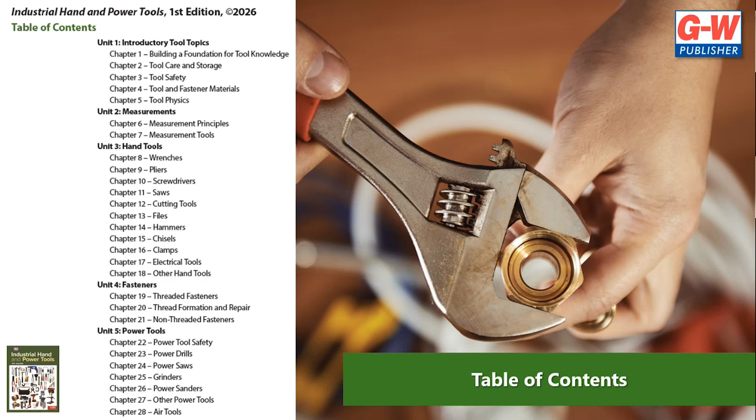Speaking of flexibility and also consistency, there's a deliberate consistency among the tools chapters that was developed by Jim and his editors. Jim, do you want to share the importance of making sure that these topics were included in each of these tools chapters?

Yeah, I think I just wanted to make sure that it was comprehensive. I didn't want to leave anything out. It was helpful to have a standard format to begin each chapter with an overview of what the tools do, and then to have sections on very specific types of those tools.

To have a dedicated section on safety, a dedicated section on care and storage. And then every chapter also has a very short paragraph at the end that says, of these 17 different types of pliers that we talked about, obviously you can't carry around a toolbox with every tool in that book, but if you're going to be selective, here's the 3 that we recommend. And that's tied together in an appendix at the end of the book. In Appendix A, I have a couple different versions of recommended tool sets.

Excellent. As I mentioned, we're going to sprinkle some student feedback throughout the session today. One of Jim's students said, I appreciated how consistent the chapter organization was, and the content was thorough without getting too into the weeds of specific use cases. So nice to hear directly from your students on this.

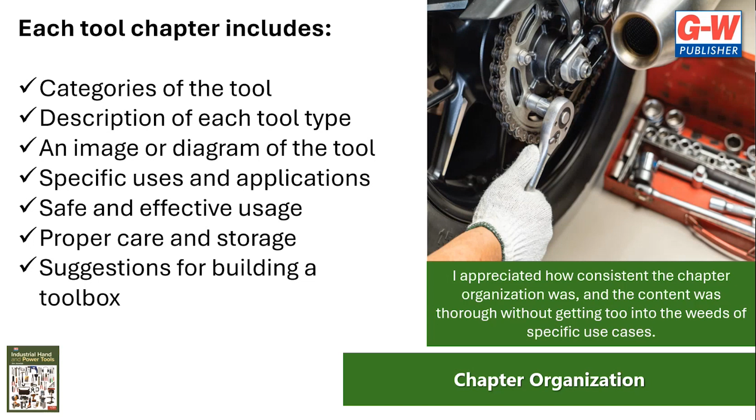So we're going to walk through a complete chapter to give you a sneak peek of what these chapters look like, as we wait for the sample to be available for all of you. We're starting with the Unit 3 opener. It's a unit opener that contains a number of chapters. You'll see the list of chapters is included in the unit opener, as well as a nice introduction to the complete unit that sets the stage.

At this point, I wanted to mention another comment from one of Jim's students. He said, I've used hand and power tools for most of my life, but I feel like I have a much better understanding of the tools and processes far beyond basic use and function. That might even speak to the physics chapter, Jim, or some of the other information you've included in the chapter. I thought that was a really nice comment from one of your students.

Yeah, it was nice. As I said, I wrote this with the novice in mind, but I've had a number of students who really do have a good background and understanding of tools, and most of them have told me that they did learn something. I read that too in the student feedback. I thought that was a perfect balance.

So here's chapter 8, and the chapter openers are designed with the learning outcomes, the technical terms, and an overview of the chapter content. Some key notes: the learning outcomes are tied to the specific sections of the chapter and also to the end of chapter content. You'll see 8.1 through 8.12, which show you the learning outcomes and which sections those learning outcomes are going to be covered.

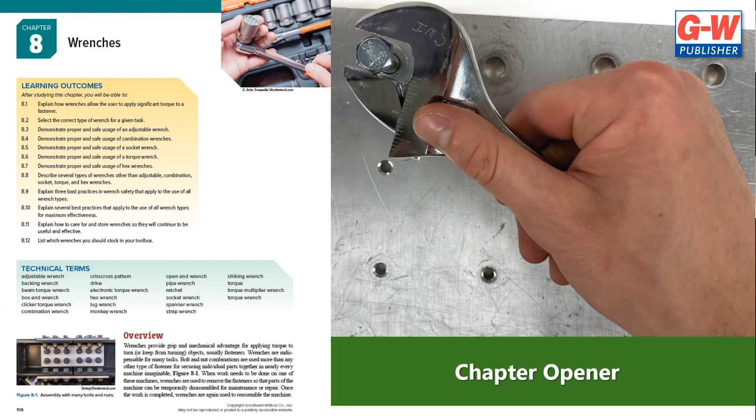So absolutely. As we flip through the sample chapter, you'll see those section numbers that align with the learning outcomes I just mentioned in the chapter opener. And as Jim mentioned, you'll find many charts, figures, and images. You'll also see that the content is broken up in chunks to make it more student friendly.

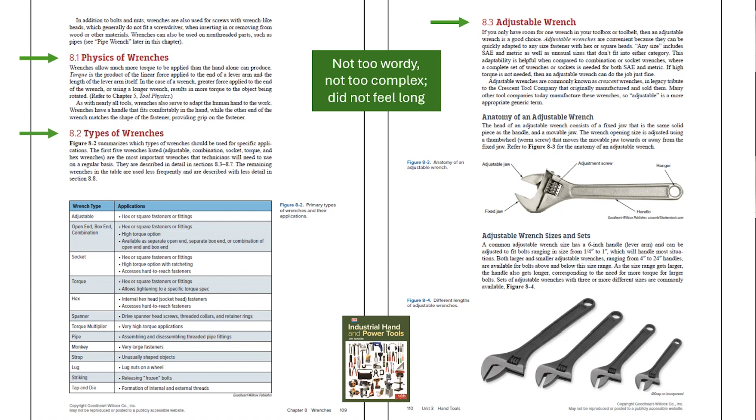The green box up at the top: not too wordy, not too complex, did not feel long. I think that's a wonderful student testimonial for the content, that they really liked the amount of content and the way it was organized, so it never felt too wordy to them. It's a tough line to walk, to include enough content to be comprehensive, but not to get long and boring. Exactly. Well, I think you achieved it.

It does. Super visual, image-rich text makes it easy for students to clearly identify the right tool for the job. And as Jim mentioned earlier, a lot of students are new to this. They don't come to class with a lot of tool identification skills in place, so these images are super helpful, especially for those beginning students. And then there are step-by-step instructions, which you'll see at the top there, that describe the proper use of many tools. Do you want to talk at all about some of those step-by-step procedures, Jim, and how they're woven into the chapters?

I think it kind of speaks for itself. It is included along with pretty much every tool, how it should be properly used. In many cases, I would group tools together and speak in a little bit more general terms, not necessarily a procedure for every individual tool.

Awesome. And I know that there was a big emphasis on safety, and you'll see these caution boxes throughout the text and safety tips that provide that strong emphasis on safety to protect the workers and the equipment. And then there are pro tips that offer advice and guidance, especially applicable for on-the-job situations.

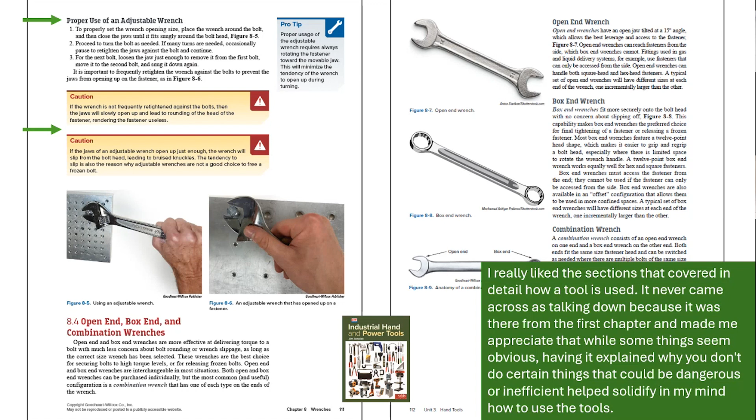Kathy, you mentioned about the cautions and the pro tips and the safety tips, and I just want to say that I'm pretty sure that's a standard GW textbook thing, and I love it because there are these little nuggets of information that these tips provide a means to get highlighted that otherwise would, I think, just get lost in the text.

I think you're right, absolutely, and you're right. Safety is always important with any of these disciplines. And the pro tips, what I like about those too is these students are all preparing for careers, and they really provide some relevant advice to them that they'll use in your classes and also as they start their careers. So I'm glad you like those as well.

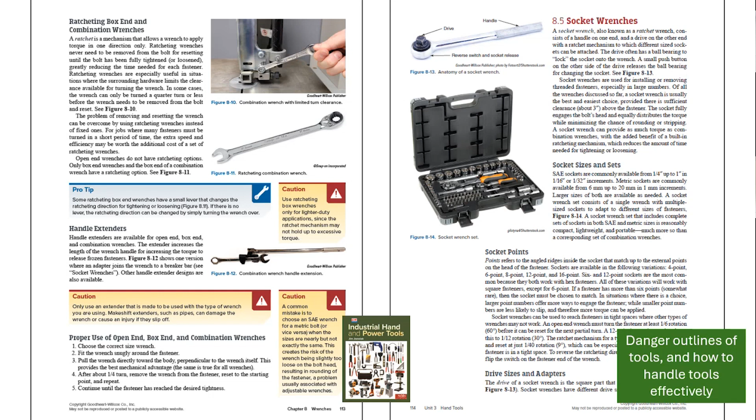Again, so many images. So this just, as we lay out this chapter, every time I flip through the pages, I'm just amazed in how student-friendly the book is laid out.

Again, here's some more caution statements, another step-by-step procedure, this one on the proper use of open end, box end, and combination wrenches. And students with little or no experience with regards to tools need to see these tools, as we mentioned, was why it was so important to make this text so visual.

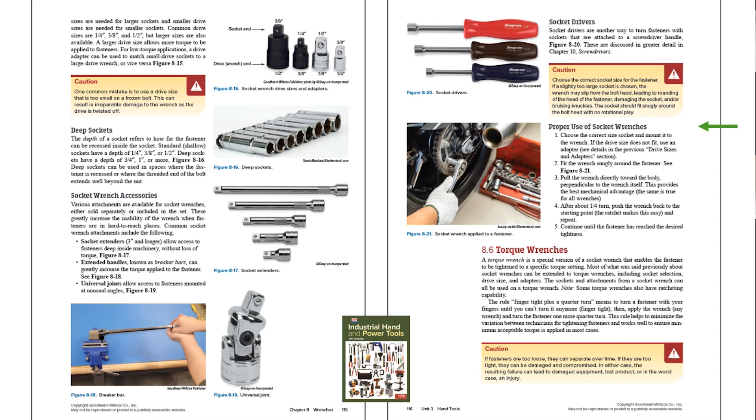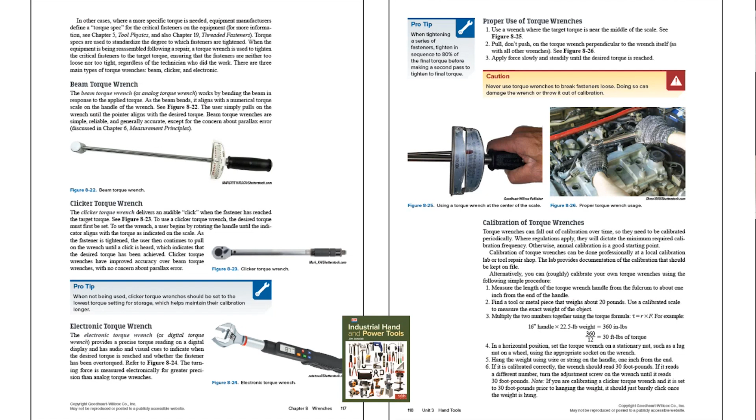And then I wanted to make a note too that the figures and procedures are all located at the point it is covered in the reading. I always love to share that GW is fairly unique in that we have an in-house editorial team and an in-house creative team. We don't ship it out to other countries to create the books.

They're really done together with Jim and with his own editorial and production team. And we're very diligent about making sure that the content flows well with the images, and students aren't required to flip through pages to find the correct figure, on a different page than where that content is being covered. So that's really a nice attribute of all of the books, and it's certainly true here with Jim's with all of these images that are included.

Again, his student mentioned the images were a great support. It was a good mix of text and images. So I couldn't write these any better myself. Your students had some great insight.

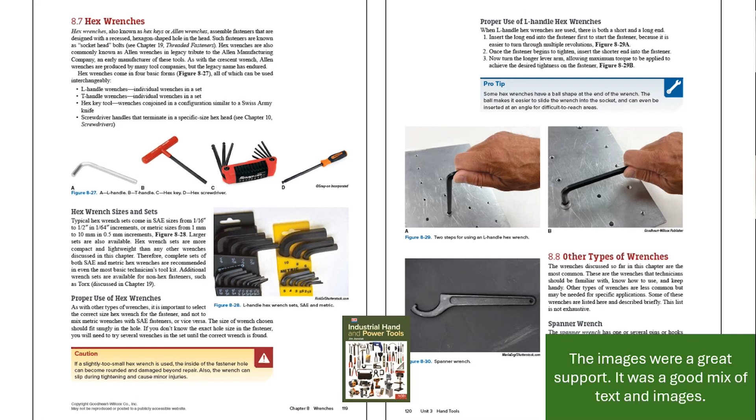As we go through this page, I'll just do another student note. It said, I think for a novice with no experience, it's not intimidating, and it doesn't speak down to inexperience, while at the same time it's technical enough and has a large enough variety to capture the attention of students with experience. So again, they're reinforcing how you laid out the book, and neat that it's being recognized that way.

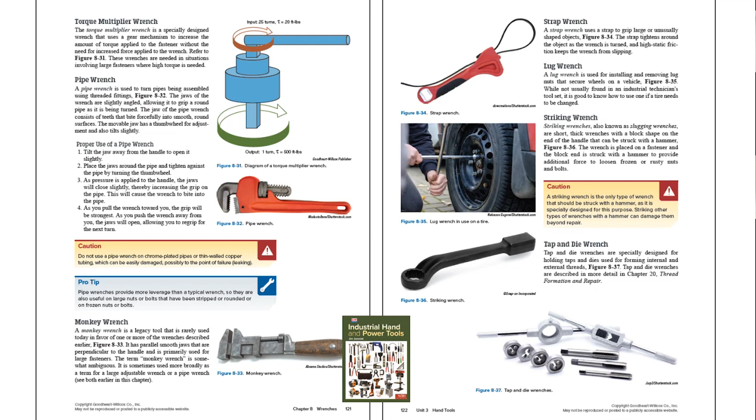And here again, we all know students love visuals, and this student mentioned visuals help me learn, and there were a good number of them. I like each tool having at least one visual and a subsequent image showing any additions or uses of the tool.

And then Jim, I think you mentioned it earlier, but that last section about which wrenches should you have in your toolbox, in this section on wrenches, I think that's what you were referring to, right? When you talked about them being able to build their own toolbox with recommended tools. Yep, I think every technician should build their own personal toolbox. Absolutely.

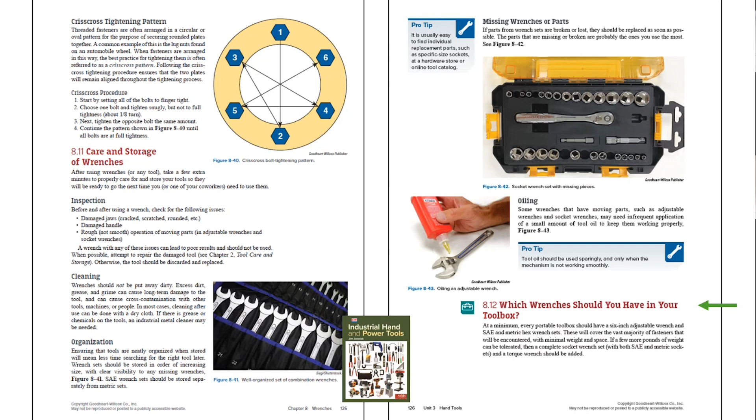And then at the end of every chapter, you'll find a summary, know and understand questions, apply and analyze questions, and critical thinking questions. You'll see parentheses with 8.1, 8.3, and those tie to the learning outcomes that tie to the sections and then tie to the end of chapter. So it really provides a nice reference point for students and instructors as they're looking at questions and need to reread something. It's easy to go back and find the section where that information was covered.

Jim, is there anything you want to share about the end of chapter content or how you might have used it with your students? Maybe a little.

So each week in my class, I assign generally 2 chapters. There's 28 chapters in the book, and in a 15-week semester, that actually works out pretty good. That's just by accident, I didn't plan that. But each week there are 2 new chapters that introduce 2 new categories of tools, and I assign those as a reading assignment to be done before they walk into class on Monday. Then on Monday, I deliver a short lecture. We then go into the lab, and I have something of a show and tell where I have the tools all laid out, and I essentially just introduce them to all the different types of wrenches, etc. I will say that I built up a pretty comprehensive tool set in my lab over the last few years, so I have samples of almost everything that is in this book. And then the rest of the week, we do hands-on activities on those tools.

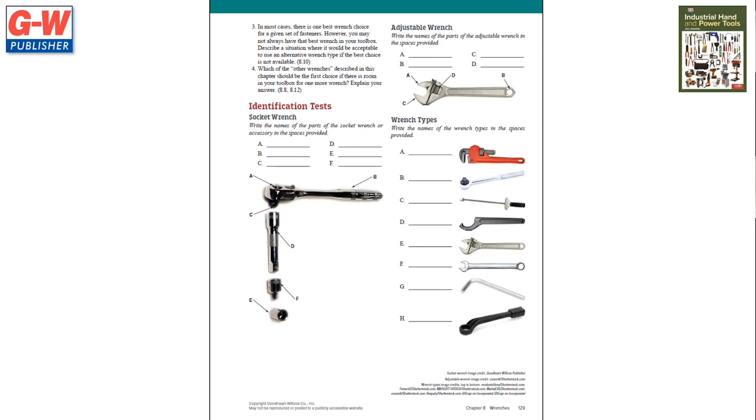Right, that's excellent. And then you mentioned the hands-on activities, and these are included also at the end of the chapters that actively engage students as they put tools into practice in the workshop and answer questions to reflect on their results. Competency test tables are provided so that students have a clear understanding of expectations and instructors have ready-made grading criteria. I know you just talked about some of the hands-on activities with your students. Now that we have it shown here for our audience, is there anything else you'd like to talk about as far as these hands-on activities?

The only thing I want to say is that most of these have been road tested. Long before I started on this book, I was already doing these in my lab and tweaking them and making them better from semester to semester. So what's written in here is what I use, and it's already proven to work pretty well.

That's wonderful, that's fantastic. And I saw that at the end of the activity, there's the reflection and questions. I think that's wonderful for students to be able to go back and provide that reflection and answer questions based on it.

And then finally, that instructor evaluation criteria. Anything you'd like to share from an instructor point of view for the criteria and rubrics that are available for instructors? I think it's just good to be consistent about what we're looking for, and to be sure that all the bases are covered, that all the safety procedures are being followed and personal protective equipment is being used, and best practices, etc. I think it just makes sure that all the boxes are checked.

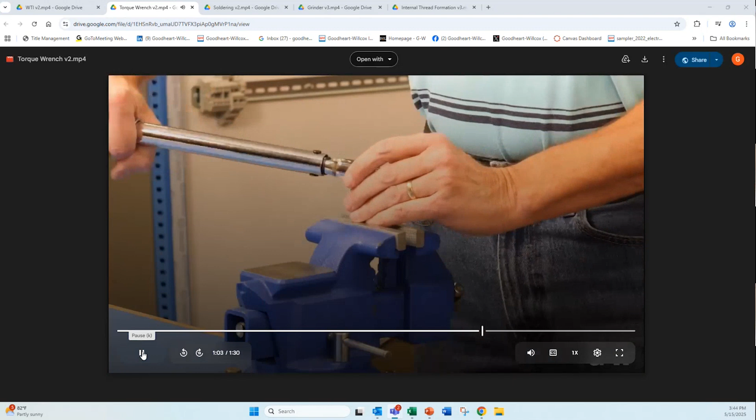Here I have the nut bolt assembly secured in a vise, so a backing wrench is not needed. However, use a backing wrench if necessary. Mount the socket securely onto the head of the bolt and pull the torque wrench toward you just as you would a socket wrench, and continue to tighten using the ratchet mechanism. Then, when the assembly becomes tight, your torque wrench will make an audible click. This is an indication that you have reached the target torque that you have set on the wrench.

The tools for this job are a tap and tap wrench, which can be found in a tap and die set. Today, for our demonstration, we'll be creating internal threading for the placement of a bolt that has a 1/4 inch diameter and 20 threads per inch.

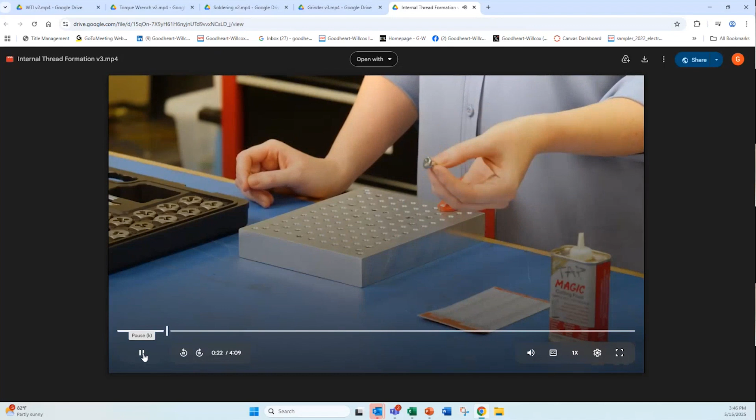What's the difference between a power drill and an impact driver? They both seem to look pretty much the same to me, says our friend in Canada, Jim. A power drill just uses an electric motor to turn the spindle that has the chuck that the drill is attached to, and is limited to the amount of power that the motor can generate, which in some cases can be a lot of power.

And when using a power drill, especially if you are, for example, using it to insert fasteners and the fastener starts to get tight, or maybe you're drilling a hole and the drill bit gets stuck, the power of the motor suddenly gets transferred to your wrist, and there you can actually get injured as a result. With an impact driver, there's an internal spring.

You're right, it looks similar to a power drill and behaves similar to a power drill. You can do similar things. An impact driver is mostly used for fasteners. It isn't used so much for drilling. But the internal spring provides percussion force in addition to the rotation force of the motor, and can generate more torque on the fastener than a power drill can, but that does not get transferred to your wrist. And so as the fastener begins to tighten, it's essentially hammering on the fastener, tightening it further, but you're not feeling any of that tension transferred to your wrist.